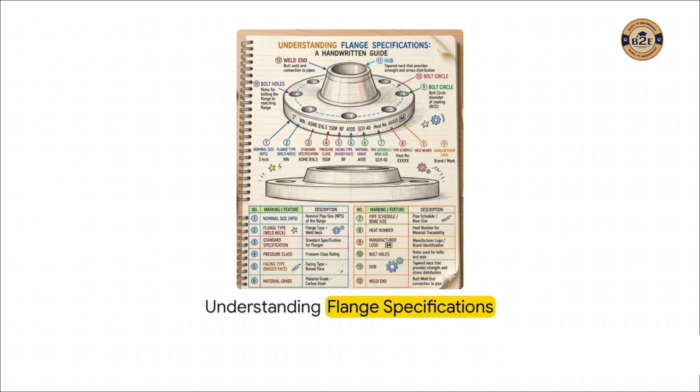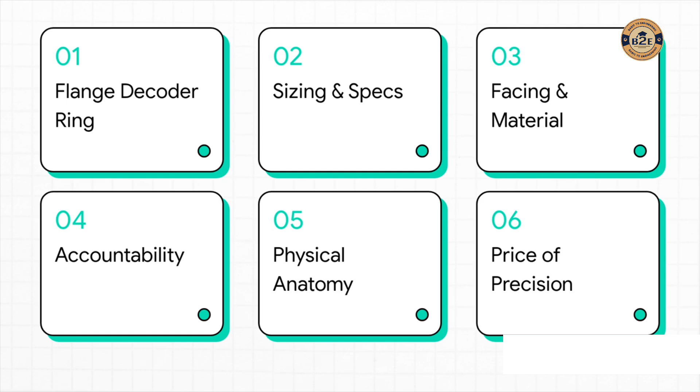But to an engineer or pipe fitter, this is a highly detailed passport. It's like a structural nutrition label. It tells us exactly what this component can handle, exactly what it's made of, and exactly how it's meant to be used. To make sense of all this, here is our quick roadmap for the explainer. We'll start with the flange decoder ring, move into sizing and standard specs, then facing, material, and schedule. After that, we'll cover accountability and traceability, check out the physical flange anatomy, and wrap up with the price of precision. Okay, part 1, the flange decoder ring, where we start reading the secret language.

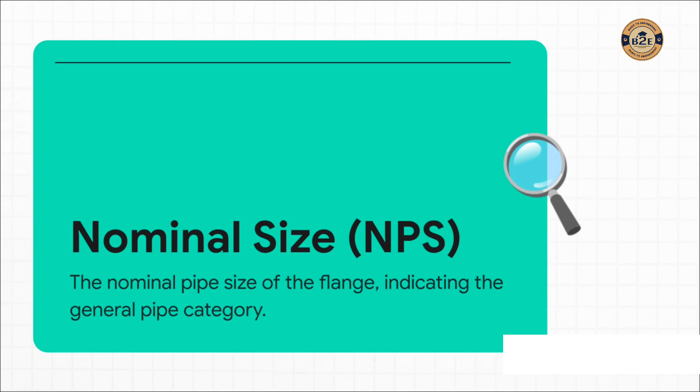Moving right along to section 2, sizing and standard specs. Let's decode the core. The very first number you're going to see in the sequence is 3-inch. This indicates the nominal size, which is often abbreviated as NPS, or nominal pipe size. Basically, this sets the baseline for the entire piping system. It is important to note, though, that nominal means it's a standardized designator. It's not necessarily the precise measurement of the pipe's outer diameter down to the absolute millimeter. Instead, think of it as the general category of pipe that this flange is designed to seamlessly mate up with.

Next up in the sequence, we've got the marking WN, which specifies the flange type. WN simply stands for a weld neck flange. Now, there are quite a few types of flanges out there: slip-on, blind, threaded, you name it. But a weld neck, that's characterized by its long, tapered hub. This specific type is highly favored in really harsh environments, especially ones with extreme temperature fluctuations or super high pressure. Why? Because of how incredibly well it handles stress. We'll look closer at the actual physical shape of this later, but for now, just know that WN tells the installer exactly what type of connection they're dealing with.

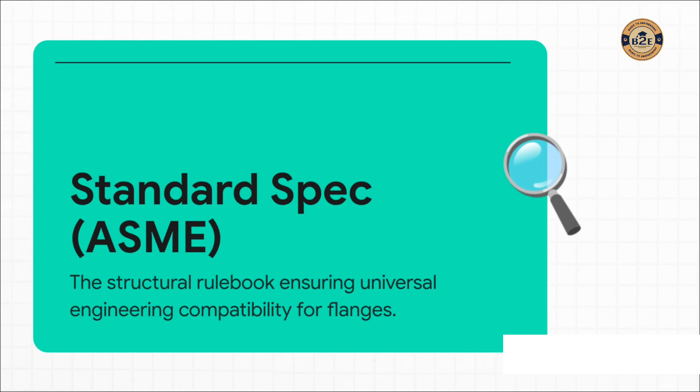Now, this next part is absolutely crucial. ASME B16.5. This means the component adheres to a strict standard specification set by the American Society of Mechanical Engineers. You can think of B16.5 as the ultimate structural rulebook for pipe flanges and flanged fittings. Seeing the stamp is an absolute guarantee of universal engineering compatibility. It literally means a flange manufactured in Japan can perfectly mate with a flange made in Germany as long as they both carry this exact specification. It basically brings order to what would otherwise be total global industrial chaos.

Wrapping up this core sizing group is the 150# marking. This defines the pressure class rating, telling engineers exactly how much force the component can safely endure. Now, a really common misconception is that 150 pound means it can hold exactly 150 pounds per square inch of pressure. It's actually a bit more complex than that. It's a class rating that interacts with the temperature of the fluid inside. As temperatures go up, the allowable pressure actually goes down. But this specific class gives engineers the vital mathematical starting point they need for all their safety calculations.

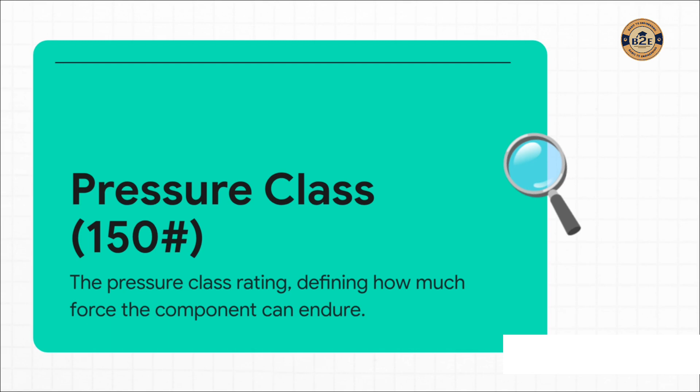Let's jump to section 3, facing, material, and schedule. This is all about fit and composition. So let's break down the next 3 codes in our table. First up, RF. That stands for raised face. This just means the area around the bore, where the gasket actually sits, is slightly raised above the bolting circle. It's a clever design because it concentrates the pressure onto a smaller gasket area, which creates a much stronger, tighter seal. Next, we see A105.

This specifies the material grade. In this case, a forged carbon steel that's exceptionally tough and pretty standard for high-temperature service. You literally have the chemical recipe stamped right onto the metal.

Finally, SCH 40 dictates the pipe schedule, which corresponds to the pipe's wall thickness and bore size. Schedule 40 ensures the internal bore of the flange perfectly matches the internal bore of the pipe it's being welded to. That's super important for preventing any internal turbulence in the fluid flow.

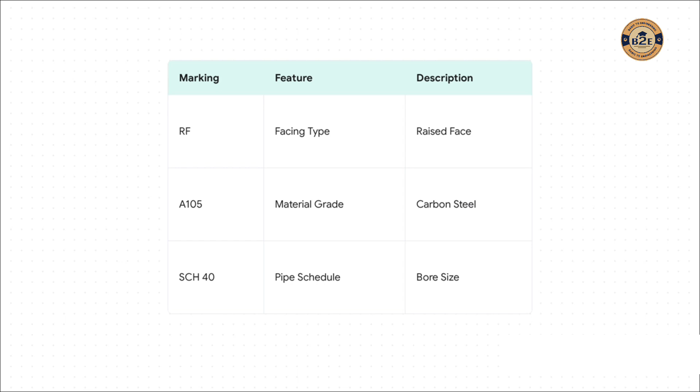Moving on to Section 4, Accountability and Traceability. Think of this as the industrial barcode. Towards the end of that text string, you'll spot a marking like heat no XXXX. Now, to someone outside the industry, that might look like a typo or just some random serial number, but it is actually the most important barcode for material traceability on the whole component.

The heat number traces this specific piece of metal back to the exact batch, or heat, of molten steel it was originally forged from. If a flange ever fails in the field, engineers can trace it right back and recall any other parts made from that exact same batch of steel.

And right next to it, you've got the manufacturer's identifying logo, represented by an M here. This is their brand mark. It's basically the manufacturer putting their name and their reputation on the line, declaring they stand by the quality of this part.

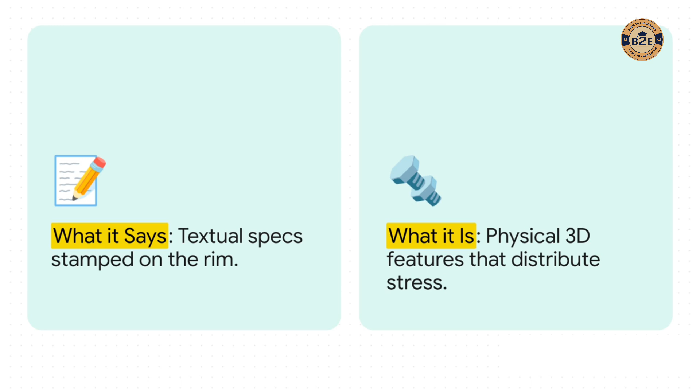All right, Section 5, Physical Flange Anatomy, what it actually is. Okay, so we're transitioning now from what the flange says about itself, all those textual specs we just decoded, to what it actually is in the physical world. Because the brilliant thing about a flange isn't just the material it's made of, it's the highly calculated 3D geometry designed specifically to distribute physical stress.

Looking at the diagram's physical callouts, we can identify features 10 through 12. Number 10 points out the bolt holes, which are precisely arrayed along what's called the bolt circle diameter. This is exactly how the flange mechanically fastens to a matching one. Then, number 11 points to the central hub. Remember earlier when we decoded WN for weld neck? Well, this hub is that neck. It's a beautifully tapered cone.

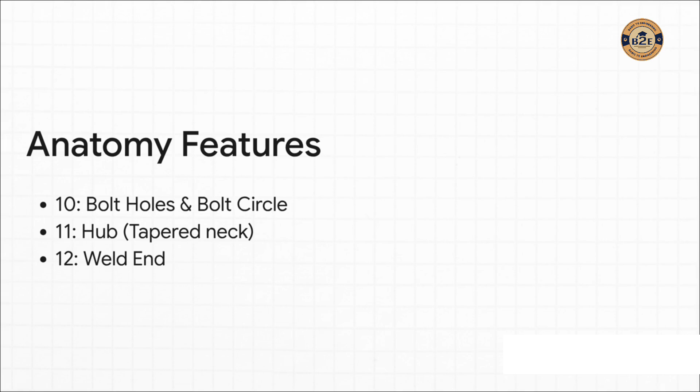And finally, number 12 is the top edge, the weld end, where a butt weld connection physically and permanently joins this flange to the end of a pipe. This brilliantly illustrates the path of force and really shows why this shape is such a marvel of engineering. Imagine the process happening in real time. First, high-pressure fluid enters the pipe and hits that weld end connection at the top.

Second, instead of that immense stress slamming into a hard, sharp corner, the energy and mechanical stress just gently travel down the hub's tapered neck. That smooth taper prevents stress concentration, which, by the way, is the #1 cause of metal fatigue and cracking. And finally, all that beautifully distributed stress safely transfers across the joint, tightly secured by massive bolts threaded through those bolt holes. The shape itself acts like a giant shock absorber for industrial pressure.

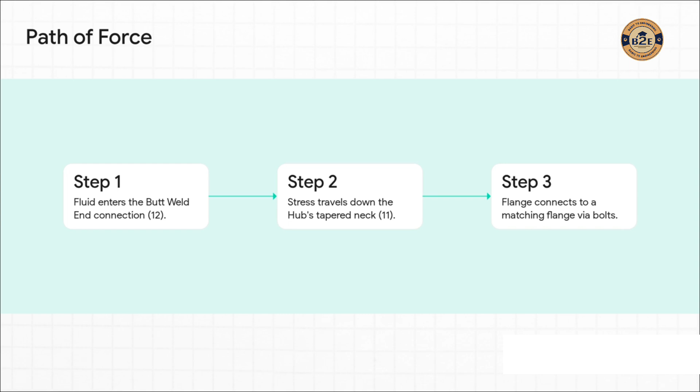And that brings us to our final section, the price of precision, and why these markings truly matter. The reality here is that these aren't just arbitrary letters and numbers stamped onto metal for the sake of bureaucracy. A missing heat number isn't just a typo, it represents a fundamentally compromised system. Without absolute, complete traceability, without knowing the exact material grading like A105 carbon steel, or knowing that specific pressure class of 150, catastrophic failures become a very real, very terrifying threat.

In a chemical plant or massive oil refinery, a flange failure doesn't just mean a tiny leak, it can mean a massive explosion. The precision of these markings is literally a matter of life and death. They ensure that every single link in the chain is exactly as strong as it needs to be.

To wrap up our deep dive, I want you to consider this thought. The precise markings on a flange act as its unique identity, telling you everything about its capabilities, origins, and structural integrity. It really is this meticulous identity system that allows pipefitters and engineers all over the globe, regardless of their language or geography, to collaborate safely. They rely on this exact system to build the massive, invisible infrastructure that powers our cities, fuels our transportation, and honestly, just sustains our daily lives.

So I'm going to leave you with this final thought. Next time you happen to walk past an exposed industrial pipe, maybe in a boiler room, a factory, or even just some exposed city utility work, will you take a closer look? Will you be able to crack the code stamped right onto the metal? Hopefully, this explainer has given you the decoder ring you need to look at the highly engineered world around us with a whole new level of understanding and appreciation.